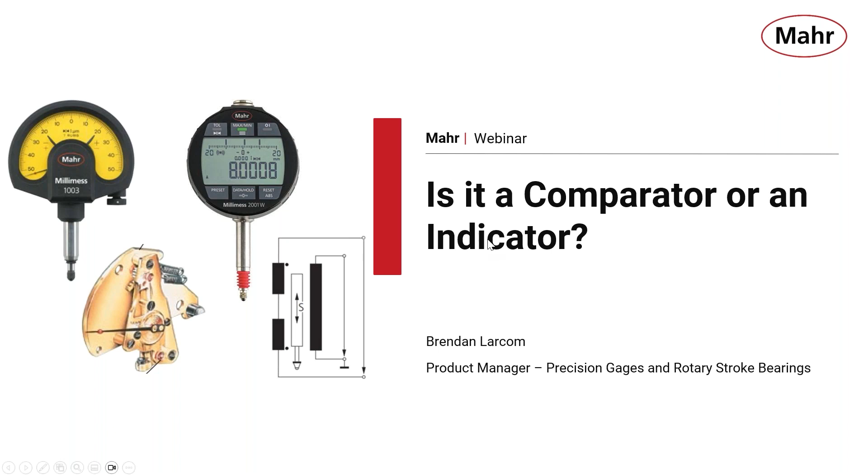Today we're going to be talking about comparators and indicators, specifically the differences between them. For those who don't know me, my name is Brendan Larcom. I'm one of the product managers here at Mahr Incorporated. I've been working with Mahr for the past 7 years, and I've focused a lot during my career on the precision hand tool side of things, which is exactly what we're going to be diving into today.

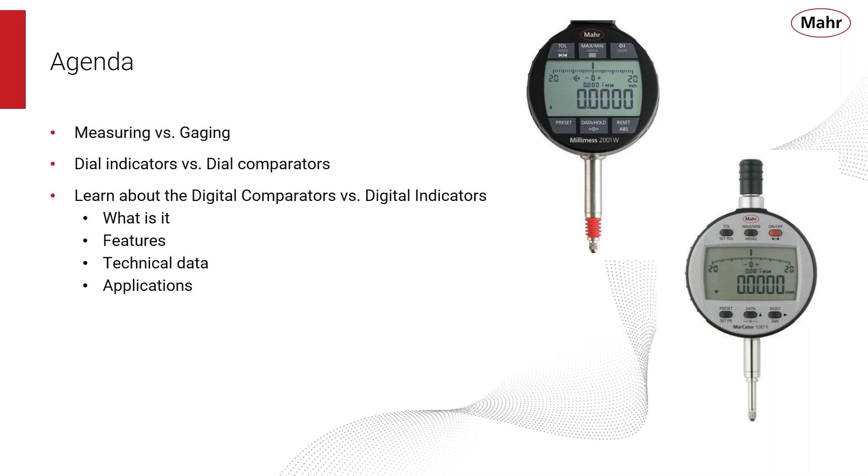So, topics for today: the overall agenda is going to be talking about the differences between comparators and indicators. But to do that, we're going to talk about some background knowledge first. We're going to talk about the differences between measurement versus gauging. Then we're going to look at the differences between dial comparators and dial indicators. And then we're going to step into digital comparators versus digital indicators and really get into detail there, because that's where we're seeing a lot of trend moving in the marketplace. We're still seeing that highly accelerated trend of people transitioning from analog equipment to digital, and that is even more so in the digital comparator space. As to exactly why, we'll get to that when we get to those slides.

First thing we need to think about when we're talking about what is a comparator versus what is an indicator is that there's a major difference between measurement and gauging. Measurement is the process of determining the dimension of a part by comparison with an internal standard. Those are usually done by measuring instruments, whereas gauging is the process of determining whether the dimension of a part is smaller or larger compared to an external standard. Those are going to be, again, comparative style instruments or comparative gauges.

Anytime you're comparing an unknown part to a known master or a known artifact, such as a gauge block or a gauge ring, that is by definition what's called a comparative measurement, because you're comparing a known to an unknown. Whereas a non-comparative measurement, sometimes referred to as an absolute measurement, you're not comparing a known to an unknown. You're relying entirely on the accuracy of the internal scale that's built into your measurement device.

So when I say measuring instruments, what am I talking about? Measurement instruments always have an internal scale and measure parts compared to that internal scale. So right off the bat, you can think of your hand tools, your scales - all of these types of gauges have the standard built into them. As you can see on the screen right now, I have a picture of a caliper. The standard we're referring to in the caliper is that on the caliper, there's a little rotary encoder that basically just counts rotations, and that's how it's generating measurements.

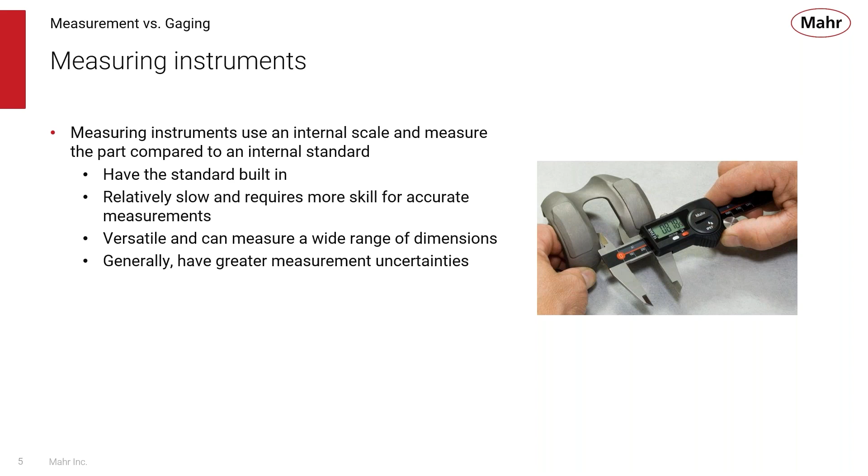All measurement devices are relatively slow, and they require a higher skill type of measurement. You need to be more of a skilled operator to get an accurate and repeatable measurement, versus a comparative style gauge, which we'll get to in a couple slides here. But where measuring instruments lack in accuracy and demand high skill level, they make up for it in a wider range of applications and dimensions that they can check. And in general, measurement devices usually have a higher uncertainty than gauges.

Now, when you're talking about gauging instruments, all your gauging instruments are, again, comparative. So when we talk about gauging, gauging is the process of determining whether the dimension of a part is smaller or larger when compared to an external standard.

That external standard is really what defines a comparative or gauge-based measurement device. Comparative instruments are always going to be faster and more accurate. They always depend on an external standard, such as a master ring, master disc, or plug, or even gauge blocks.

However, the trade-off we have to consider when talking about a comparator measurement versus a measuring instrument is that a comparator is going to be faster than a standard measuring instrument. It's also going to be more accurate. But as a result, it is going to be more expensive than a regular measuring instrument.

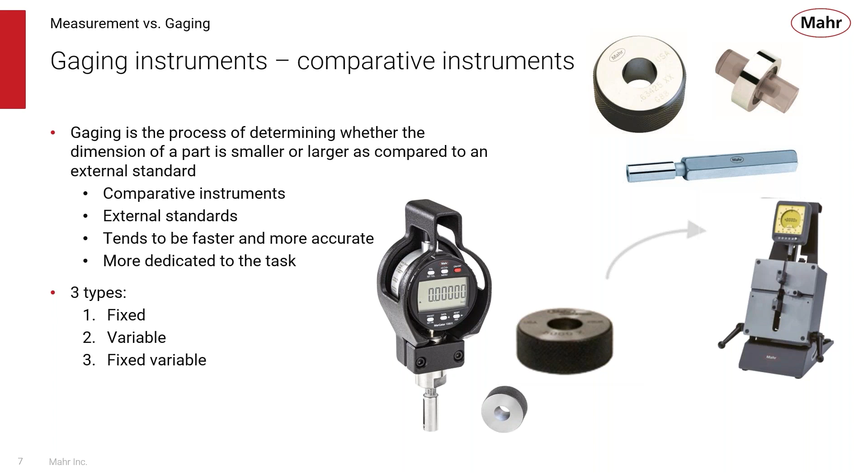They are going to be just as fast as a fixed gauge. So the fixed variable is really the best of both worlds in terms of that it's going to be just as fast as a fixed gauge, but you can actually get actual measurement results out of it like a variable.

So again, gauging instruments fixed. These are made for one dimension. There's no deviations from good or bad. There's no information about the part form. It's going to be the fastest process, and they're always good for one size.

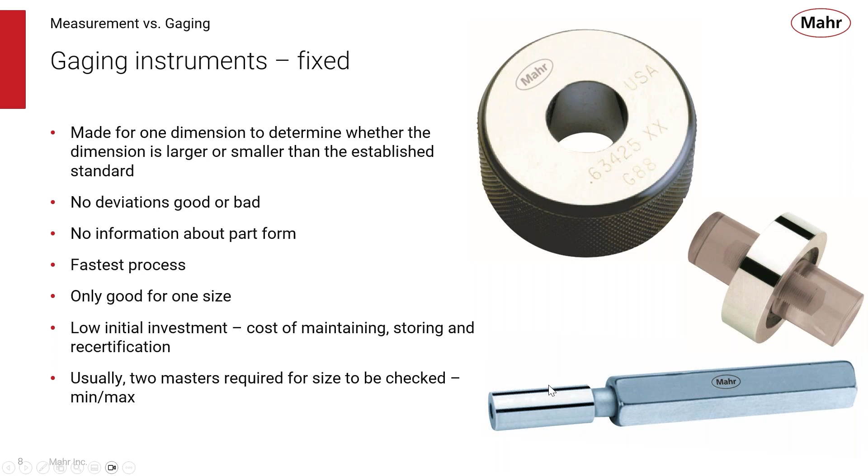While they do have a low initial investment, they are going to be more expensive because you have to maintain them over the long run. You have to store them, recertify them once a year, and make sure that they're kept in good condition. Usually fixed gauges have 2 masters in a fixed gauge - that's going to be your go, no-go, or a min and a max. So again, that's the benefits of your fixed gauge.

Moving on, going into detail about the variable gauge again. Variable gauges will indicate how much a part deviates from the standard that it was set to, in this case a master ring on this 36B gauge. You'll probably get actual deviations, actual measurement information out of it. You can use a variable gauge to find information about the form of the part that you're measuring. You can then use that information to look for trends and diagnose any manufacturing issues.

It's fast and easy. It does have a limited measuring range, but they do have a lot of adjustable range. What that means is they can accommodate a wide variety of sizes, but once they're set to a size, they can only measure a small variation around that set size. They are going to be a little bit more expensive, large initial investment, but when they're maintained properly, they can last for decades. For example, this 36B gauge - there are still examples out there on the shop floor from when they were originally introduced back in the 40s with the original version, and they still work just as well as the day they were made.

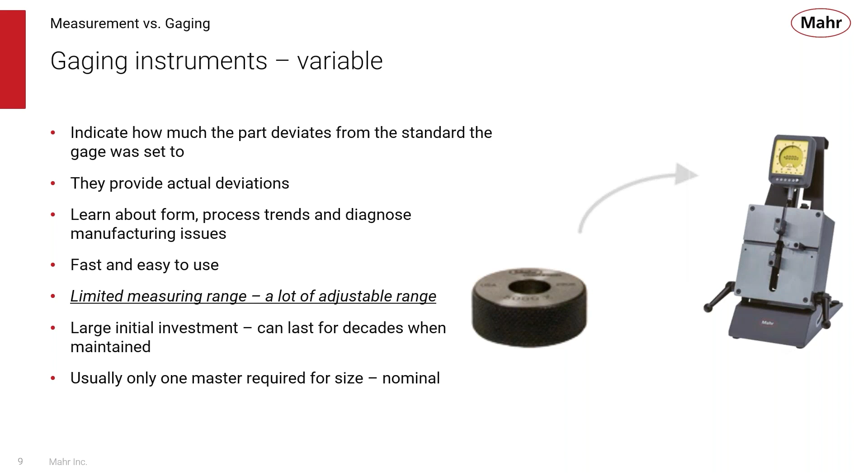Variable gauges, again, are always going to require a master to get your comparative style measurement from, so you can compare your known to your unknown. And again, they're going to be fast. You're going to get actual measurements out of it, and you can find out much more information about the part than you can with the fixed gauge.

Finally, with your fixed variable gauge, fixed variable gauges are made to a specific size. So again, if we're looking at the example of this Dimentron plug, it looks to be about a 1/2 inch in size. So most Dimentron plugs at most can have a measurement range of plus or minus 100 thou. So that means this plug right here can measure anything from 600 thou to 400 thou. That's going to be our total variation in size that it can measure.

Again, like the variable gauge, you can get actual deviations. They are the least prone to operator influence. And just like the variable gauge, you can learn about the form, and you can find processing trends and use it to diagnose manufacturing issues. They are also going to be fast - probably just as fast as a fixed gauge, and only good for one size.

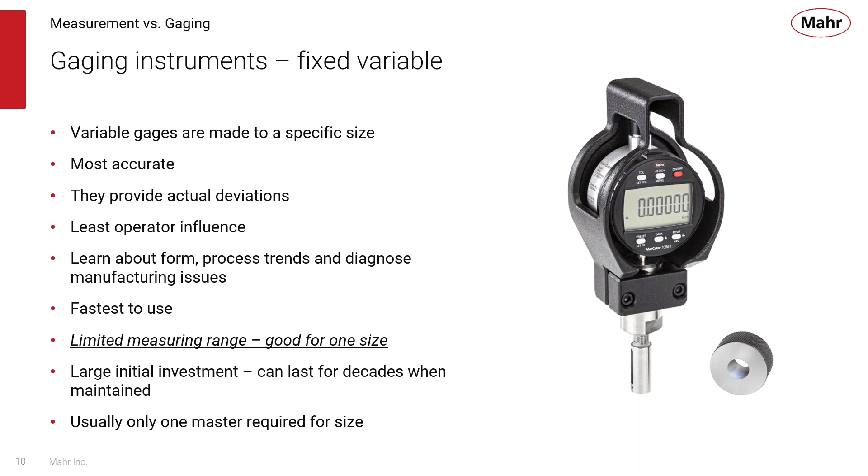And they are, again, just like the variable gauge, a large initial investment. They can usually last for a real long time when properly maintained.

So some more examples of gauging instruments. Well, we have some portable options here, such as a snap gauge, an ID OD gauge, or a rail style gauge, like you see here with this 844T. All of your bore gauges, your sweeping style bore gauges, your plug style bore gauges, like the Dimentron we saw in the previous slide, are all going to be examples of gauging instruments.

Then we also have bench mounted options of those. So even the high-end gauge block comparators, again, are comparative style instruments because they're comparing master blocks to unknown work blocks. And then you have the same thing for our comparator stands. So in this guy here, this is a ball comparator, and it's set on a setting master and used to measure the diameter of ball bearings to a very exact size.

And one of the reasons why it can get so exact and be so accurate is because, again, you're comparing a known to an unknown. There's a setting master in here, and you're comparing to that unknown size. And again, another example would be the 36B.

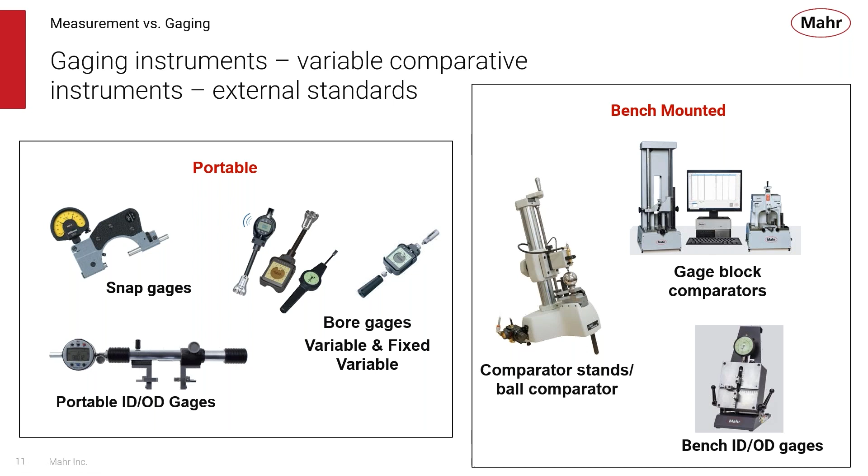That covers all of the differences between gauging and measurement devices. So let's talk about the actual comparators themselves. An example of a comparator would be this Millimess 1003. An example of an indicator would be this B5M Mahr indicator.

In general, the mechanical differences between a comparator and an indicator are very minute. Most indicators use what's called a rack and pinion design, where you have a solid steel shaft going up and down the length of the indicator with gear teeth on it. That gear teeth moves a series of gear trains, and that produces your measurement. Whereas on the comparator, they use more of a lever-based design, so they have a shorter measuring range compared to the dial indicator because of that lever style design.

Basically, inside you have a lever with some gear teeth on it. That lever gets actuated by the movement of your contact point going up and down, and that's what generates your measurement. So the real identifying feature for a dial comparator versus a dial indicator is that your dial comparator has a much shorter range but a much finer resolution and higher accuracy. Whereas your indicator, something like this B5M, has a much longer range, larger resolution, and therefore is less accurate.

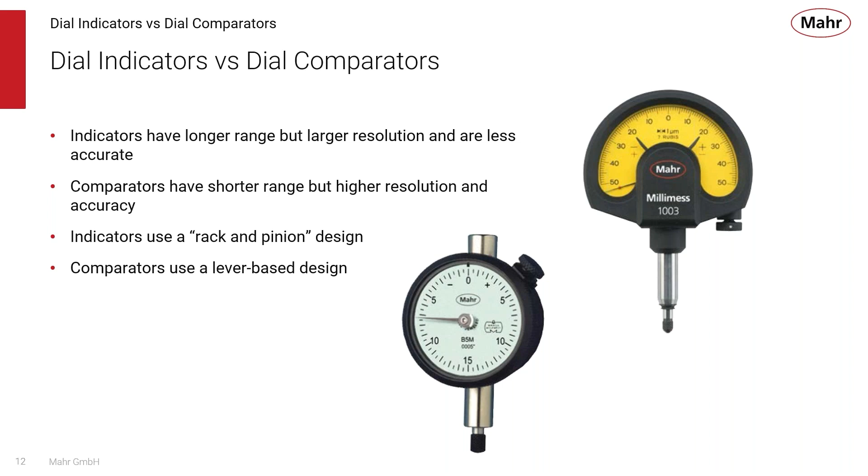We are still seeing that rapid changeover from analog to digital in the manufacturing space, particularly as Industry 4.0 comes upon us. So when you're talking about going from an analog indicator or comparator to a digital one, what are the advantages?

Well, the digital indicator or comparator is always going to provide an exact reading. There's no guesswork between splitting grads, it's always going to give you an exact measurement. Sometimes operators can get confused by dial indicators because they can be tricky to read, particularly when the dial indicator has multiple revolutions built into it. It can be hard to manually track and count all of that in your head, whereas a digital indicator or comparator will just be displaying that measurement. There's no counting you have to do.

Pretty much all digital indicators and comparators usually have an auto zero feature built in, making them faster to set zero. You can also have some quality of life benefits of a digital comparator or indicator versus an analog, where you can have options for programmable tolerances, presets, units, and dynamic modes where you can measure. So you get a bit more versatility out of your digital indicator versus an analog.

You can also display much more information immediately to the operator, whether that part is in or out of tolerance. You can show exact sizing using the preset, and you can even change the units if you have to. Obviously, the real main benefit of a digital indicator or comparator is data output. As Industry 4.0 rapidly bears down upon us, data collection is becoming king, it's going to be the name of the game. That's why you're really seeing digital indicators and comparators heavily start to phase out the analog options.

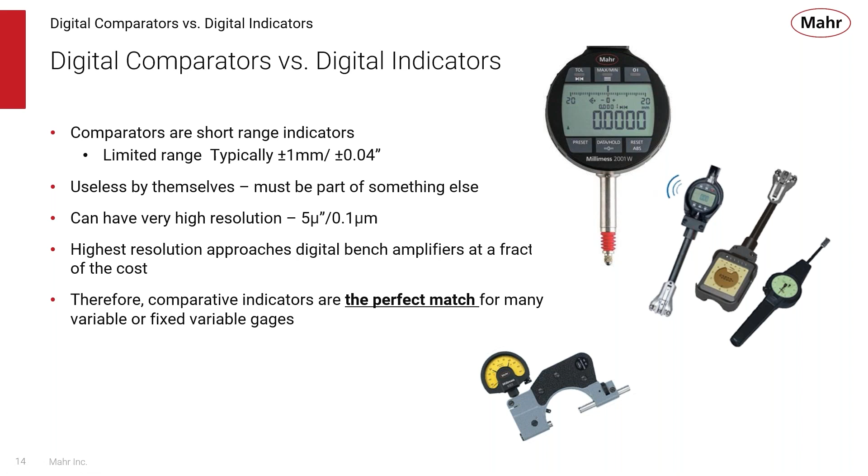We can even get more accuracy. For example, we can put a digital comparator, such as this Millimess 2001W, into a comparator stand. They're ideal for finding deviations from a reference point, and they make it very easy to use and read the comparator, so there's very little possibility for error. If you get a heavy-duty enough stand, you can get the performance of a benchtop amplifier for a fraction of the price.

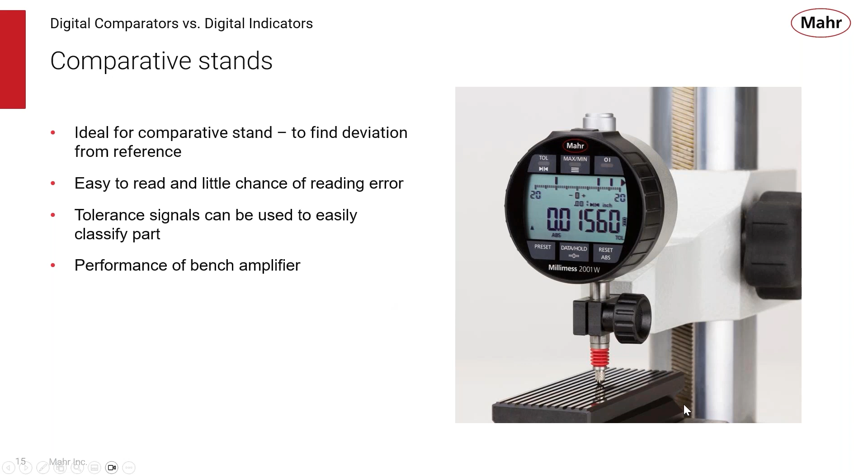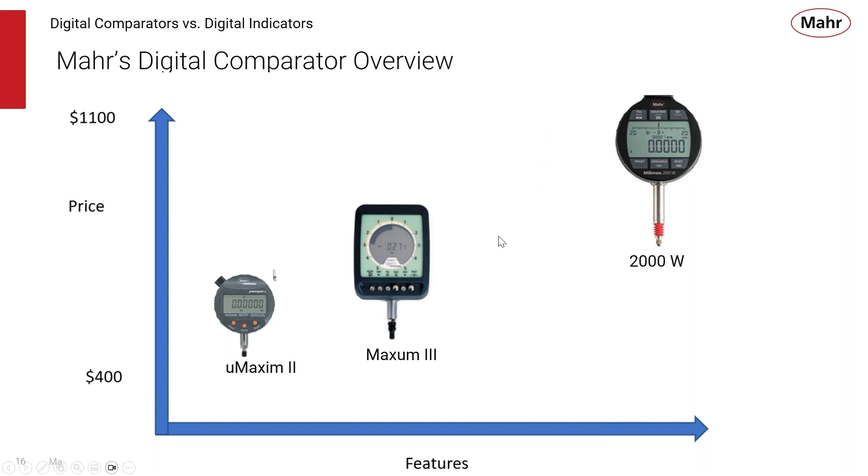When you're talking about the types of comparators we have on offer from Mahr, we have a couple of different options. We start with our Micromaxum 2, which is on the less expensive end and lower in resolution and accuracy than our other offerings. Stepping up from that, we get to the Maxum 3, which goes up in price but has a bit more features. Finally, we have the 2000 series and the 2001 series, which are at the top end of the price range but pack the most features.

Looking at each of these three in detail: the Millimess Micromaxum is a gauge I'm sure many of you have seen on the shop floor. We know this is a comparator because it has that shorter measuring range of plus or minus 1 millimeter. We have selectable resolution, which is something you can't do on an analog or dial comparator. You can see we have a tight accuracy tolerance here of plus or minus 5 microns, but as we move to the other gauges, that accuracy only increases.

Once you get to these Micromaxums and other digital gauges, you again have the option for a data interface—in this case on the Micromaxum we can go with the Mitutoyo Digimatic standard. We can communicate through an RS-232 or a USB port.

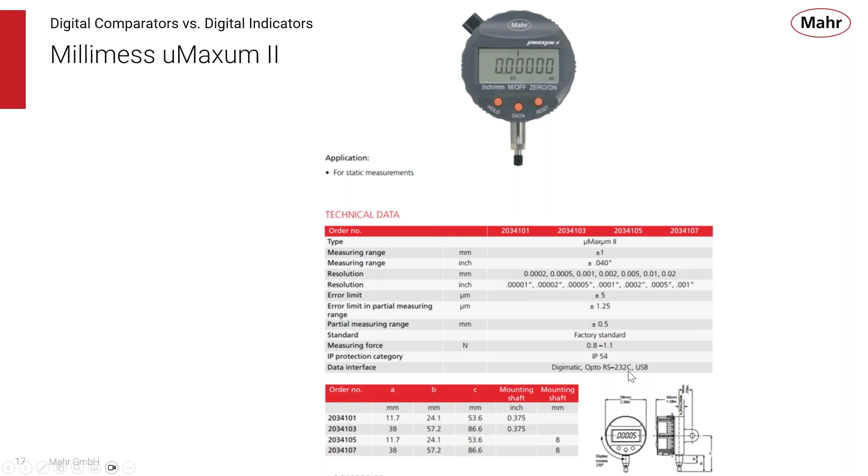Next up in our offerings we have the Millimess Maxum 3. These have a little bit shorter measuring ranges, but slightly bigger options—you can have them in plus or minus 1 millimeter or plus or minus 1.99 millimeters. But as you can see, with that you get a resulting change in error: with the longer range of plus or minus 2 millimeters you have 14 microns of error, while with plus or minus 1 you have plus or minus 10 microns of error.

What's unique to note when talking about digital comparators, particularly in the accuracy specifications, is that we have a total error limit and an error limit in a partial measuring range. This error limit means the error from positive full scale to negative full scale.

When you're using a large portion of the measuring range, this is the type of error you expect to see. However, when you're doing a true comparative style measurement, where you're setting this gauge on a master and using only a smaller section of the measuring span, you can see your accuracy increases from plus or minus 10 to plus or minus 1. So comparative style measurements are always going to be more accurate, repeatable, and reliable than an absolute style measurement, something that you would take with a caliper, micrometer, or an indicator.

Next up, we have two new gauges from Mahr, the 2000 and 2001. These are some pretty slick little gauges. Again, you can see they have a tighter measuring range, plus or minus 1 millimeter. But if you go ahead and look at the error limit, you can see it's given as an equation. This 0.02 in the front is called the base accuracy, meaning the base accuracy of the movement is 0.02 of a micron. So very, very small.

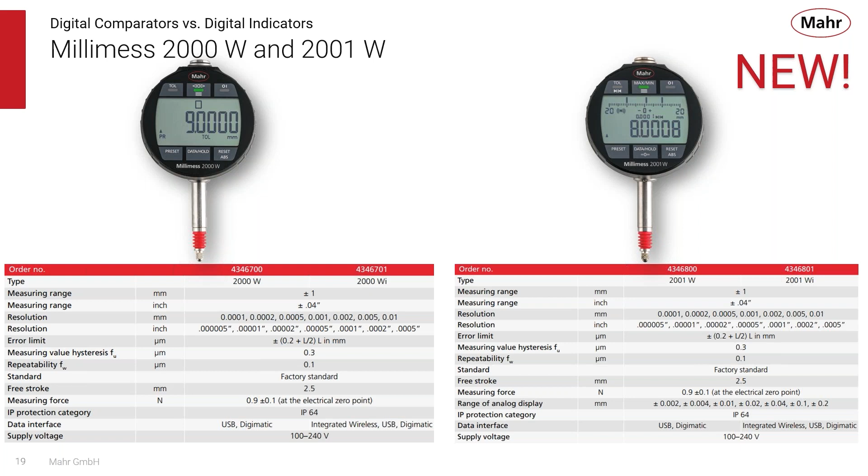But what really makes these comparators special is the screen. The Millimess 2000 and 2001 have a touch screen based interface. You can see from this picture on the side here, there are no buttons. It is entirely touchscreen based, and that makes it much more resistant to the intrusion of oils and dirts and coolants and all that other sort of nasty stuff that makes precision measurement really hard.

They're based on a tried and true technology here at Mahr with our LVDT, linear variable differential transducer. Specifically, the Mahr 1301 probe, which Mahr has been making for quite a long time. It's industry tested and trusted. We use the same type of LVDT in the 1301 probe in the new Millimess 2000, 2001s, and because of that, they're very highly accurate.

And they also have a very robust bearing built into there. This bearing is very, very stiff, and that's what's going to allow you to really get a high amount of repeatability out of this gauge, that nice rotary stroke bearing that we put in there. That's also going to ensure the longevity of the gauge, making sure you get those repeatable measurements for years to come.

That screen is fully tempered. It's scratch and shock resistant. And we do have options for screen protectors and a case protector, just like your cell phone, to further extend the life of that screen if that is something that is a worry for you. I should also mention that the screen is sensitive enough to be used with anti-cut gloves, so if you have guys on the shop floor wearing their gloves, they will still be able to hit the buttons on the indicator and be able to use it.

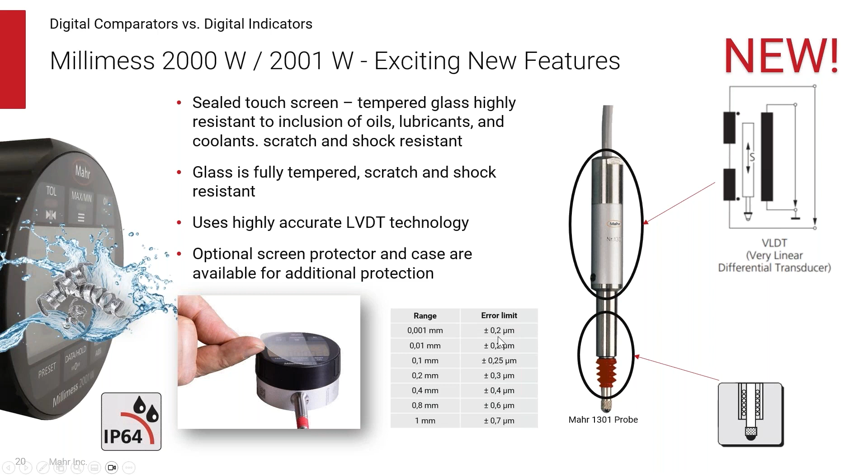Now, moving on, Mahr also has on offer a huge line of indicators. We have our tried and tested 1075 line, fixed size at 1/2 inch, able to show tolerance. We can lock out functions, IP52 rated. Then we step up to the 1086 and the 1087 line. These guys both have the option for integrated wireless, so again they can wirelessly transmit measurement data. They have an option of selectable resolutions and come in a variety of different sizes. The 1086 coming out in 1/2 inch all the way up to 4 inch capacities, and the 1087 in 1/2 inch and 1 inch capacities. Then topping the line, we have the HR versions, the high resolution.

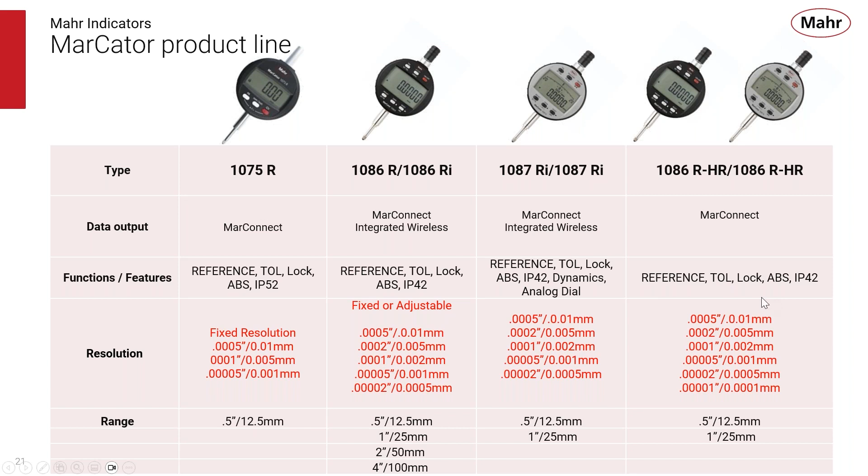These are going to have a finer encoder than the standard 1086, 1087, and they will repeat to 1 micron, which is a little bit more tight than the standard line. Again, these only come in either a 1/2 inch or 1 inch range. We have to sacrifice the 2 and 4 inch range to get that higher resolution and accuracy. But just like your other indicators, they're going to have programmable references, they can have tolerances, you can lock out functions, do absolute measurements, and they are also IP42 rated.

So looking at the chart, you can see at the entry level we have our 1075 going all the way up to the HRs. Again, very similar to our comparators, what you get more in price is compensated for more in features.

When you're talking about digital indicators versus digital comparators, you got to remember both are pretty much useless by themselves. They're usually part of a larger gauging assembly, typically a comparative style gauge. Most digital indicators have half an inch of range. Some have much more, as we saw in the previous slide, where some can go out to 4 inches. They come in a variety of ranges and switchable resolutions, allowing them to be more programmable for the exact application you may have.

Indicators are often used in comparative style measurements in a comparative gauge, even though they are not ideal for it. That is often something you see out on the shop floor or in the real world, where you may not need the resolution and accuracy of a comparator in your comparative style gauge. So therefore, you can stick with a standard digital indicator.

Also, longer range digital indicators are often used as measuring instruments in bench stands. They can be used to make length measurements against an anvil, so that's going to be a true absolute style measurement. In this instance, your indicator will be solely functioning as a measurement instrument, not as a gauge.

Some examples of applications for digital indicators: we see them often used in bore gauges, bench style ID/OD gauges, or in stands for absolute style measurements. These are typical examples of where you see these types of indicators being used.

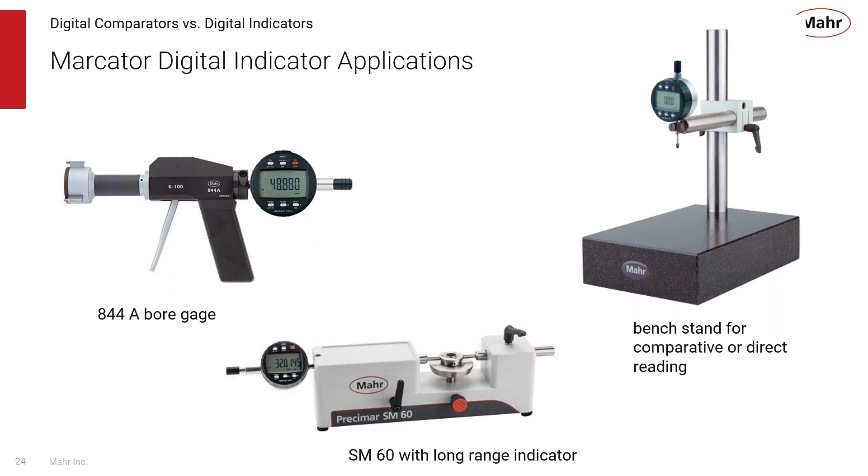So this whole thing really comes down to is that comparators and indicators really are the same thing. One's a measurement device, one's an indicator, but once you get them out on the shop floor, the layperson is only really going to worry about is if it's accurate enough for them.

So today we discussed what measurement versus gauging is, and how that helps us define what a comparator or an indicator is. We talked about the differences between them, applications for both, and went through some technical data and the Mahr product range and how they fit for ideal gauging instruments and measurement devices.